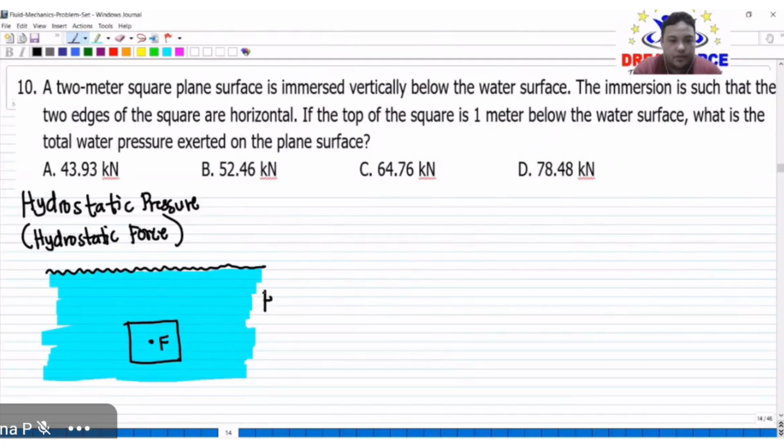So, your pressure or your force is denoted as F na lang. Siguro dito na lang. Ayan. So, ano po yung F na yan? So, your F here now is equal to what? That is equal to your pressure times yung ating area. Area na nakasubmerge. So, take note po, ano po ba ang pressure in terms of fluid? So, F now is equal to, so yung pressure natin may be a gauge pressure. So, this is equal to yung ating specific weight ng ating fluid multiplied by the height.

Pero take note po, since dalawang body to, hindi basta-basta height to. Kasi hindi naman po fluid itself yung tinutukoy natin dito, kundi yung plate na nilubog natin. So, may asterisk yan. So, multiplied by your submerged area. Okay, so ano lang natin yung parameters natin. So your F is your hydrostatic pressure or force. We have also your gamma. So yung gamma natin, this is your specific weight ng fluid.

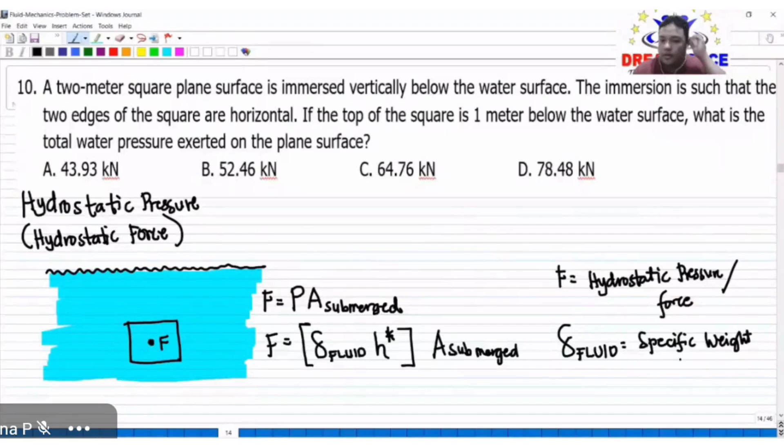We have also yung ating A. So, this is your area submerged. So, yan po yung area na sinubmerge natin. For example, square plate yung sinubmerge natin, so yung square yung ating lalagay dito. Area ng square. So, area of the submerged plate. And lastly, yung ating H asterisk. So, take note po, yung H asterisk natin, since nakafocus tayo sa plate and not the water molecule, so ano po yung H natin dito? So, this is your distance from the surface of the fluid to the centroid.

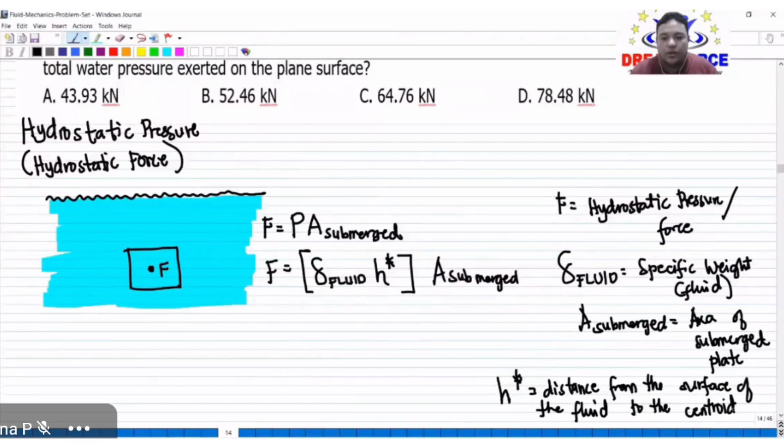So, take note po, centroid ng area submerged. Centroid ng area na nakasubmerge. So, kung square yan, syempre, sa gitna lang yung centroid niyan. Pero kung triangle yan, balik lang kayo sa mga formulas niyo for centroids. Take note po from the surface. From the surface, papunta sa centroid ng ating body.

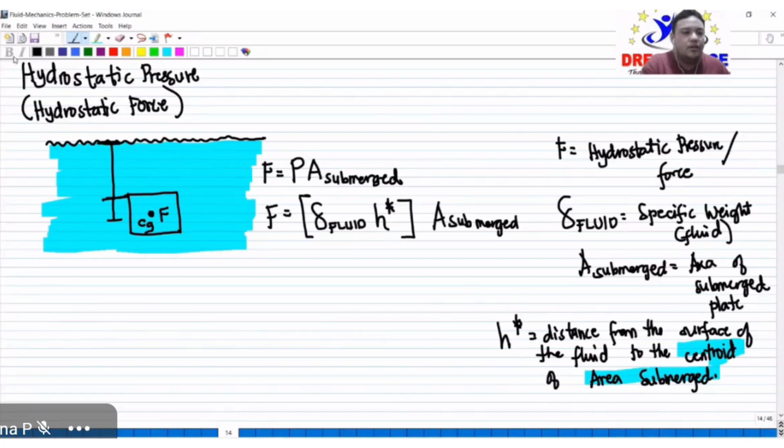Then, take note po, meron pa pong additional na CG. So, yan po yung ating H sana, pero since ang tinitake into account natin is yung plate mismo, ito yung kakailanganin natin. H asterisk. Ayan siya.

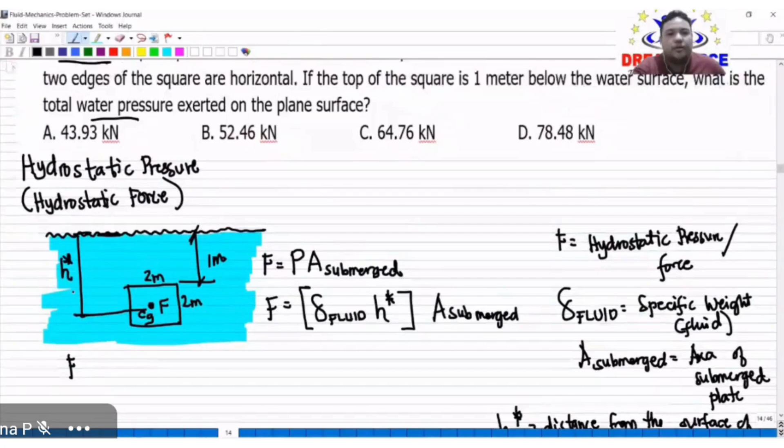Sige. Let's try to solve this one. So, a 2 meters square plane surface is immersed vertically below the water surface. The immersion is such that the two edges of the square are horizontal. So, take note po, 2 meters square. Yung sides niya is 2 meters, and yung centroid niya is mismo nasa gitna. So, if the top of the square is 1 meter below the water surface, from the surface of the water to the top of the plate is 1 meter, what is the total pressure or water pressure exerted on the plane surface? So, take note po, yung ating hydrostatic pressure yan, total water pressure. So, this is referring to your hydrostatic pressure.

So, F now is equal to yung ating specific weight ng fluid times yung ating H asterisk times yung ating area submerged. So, ano po yung ating fluid? Water po. So, therefore, specific weight ng ating fluid, 9.81 kilonewton per cubic meter. Multiplied by yung ating area submerged muna. So, area submerged is a square. So, this is 2 times 2 or 2 squared meters squared. Multiplied by yung ating H asterisk. So, take note po, distance from the surface to the centroid. Ang binigay pa lang dito is from the top of your vertical gate.

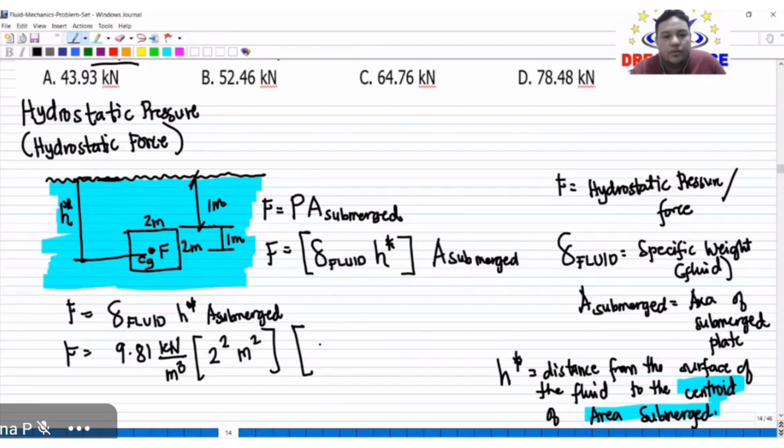Okay? So, bababa pa tayo papunta sa centroid. So, ano yung centroid ng ating square gate? That is 1 meter below the top. Okay? So, this is 1 meter pa rin. So, yung total niyan ay 1 plus 1, which is 2 meters. So, ano magka-cancel? Yung meter at saka yung meter squared at saka yung cubic meter.

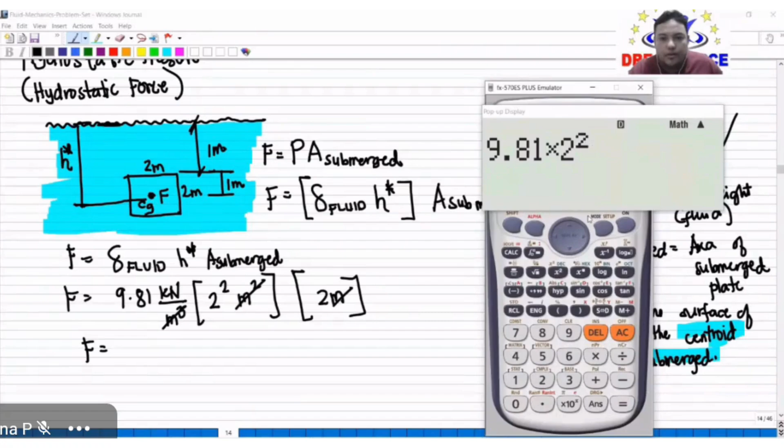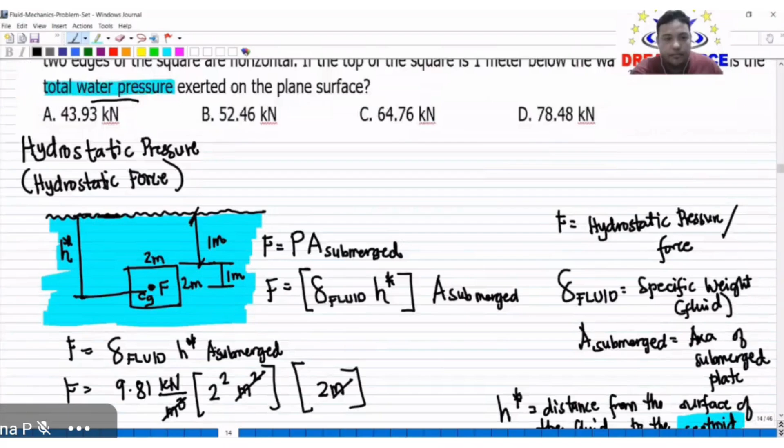So, ano na po yung ating F in terms of kilonewton? So, this is 9.81 times 2 squared multiplied by 2. So, this is 78.48 kilonewton. And that's letter D. Okay.

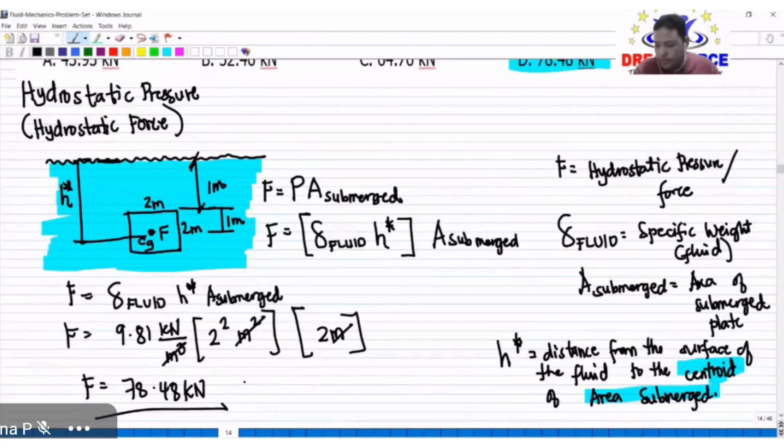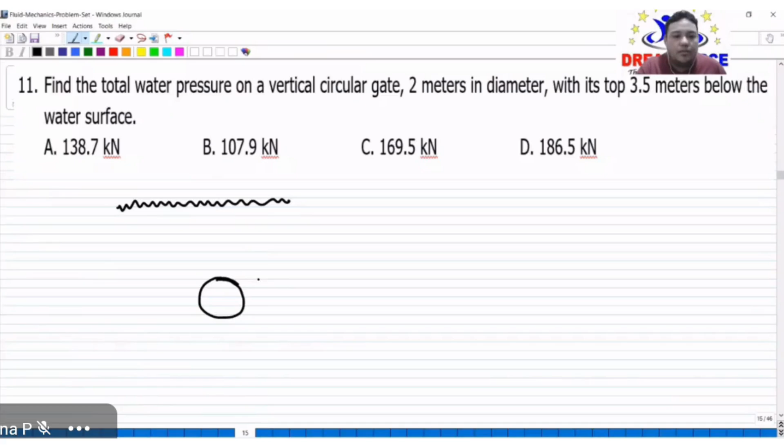So, next na tayo. Number 11. So, more on hydrostatic pressure. So, find the total water pressure on a vertical circular gate. May nilagay tayong circular gate daw dito. So, 2 meters in diameter. With its top, okay, yung top natin daw dito is 3.5 meters below the water surface. So, this is 3.5 meters.

So, hanapin daw natin yung total water pressure. So, saan po yung exertion ng ating water pressure? Sa centroid mismo ng plate. Okay, since this is circular, nasa center ng circle. Okay? So, take note po, total water pressure. So, F is equal to specific weight ng fluid multiplied by yung ating area submerged multiplied by yung ating H asterisk.

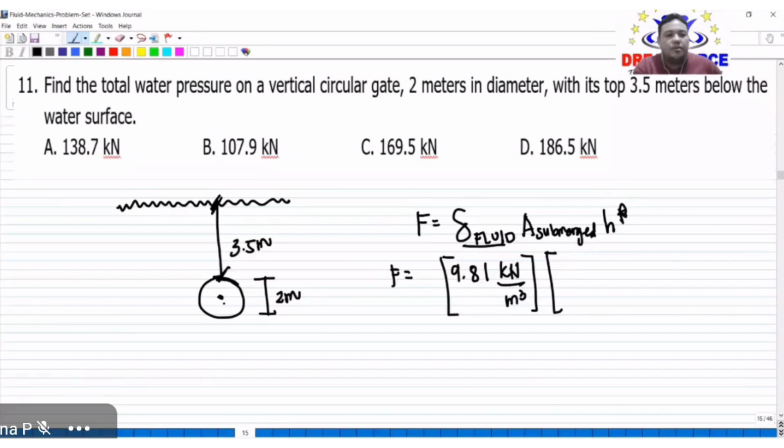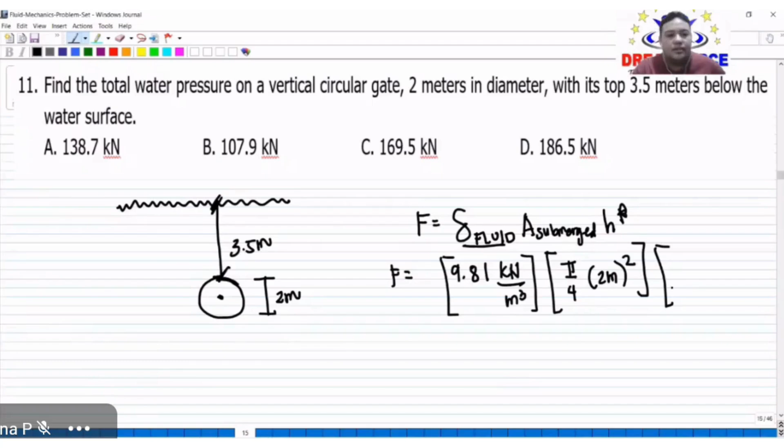So, therefore, F, take note, fluid natin, water, 9.81 kilonewton per cubic meter. Specific weight. Times yung ating area submerged, circle. So, this is pi over 4 d squared, okay? So, given yung diameter, so this is times 2 meters, the quantity squared. Multiplied by your H asterisk. Take note po, from the surface papunta sa centroid. Okay? So, ano po ba? Ito.

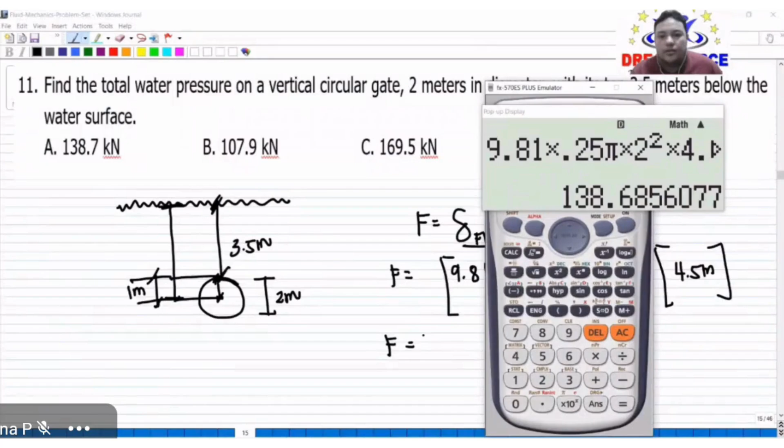Okay, so meron pa tayong natitirang hindi alam. So from the top going to the center, this is equal to the radius, which is 1 meter. So which is equal to 3.5 plus 1, so this is 4.5 meters. So therefore, F is equal to 9.81 times 0.25 pi times 2 squared times 4.5. So this is now equal to 138.686 kilonewton. And this is letter A.

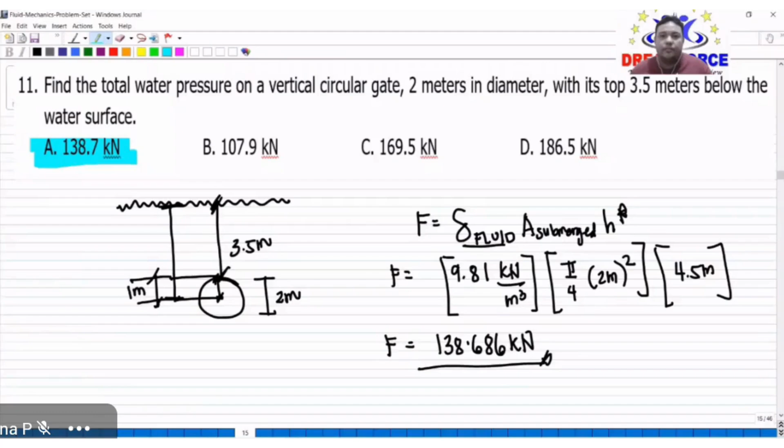Okay, punta tayo sa next. Okay, buoyancy naman po. So take note po, kapag may pinalubog tayong body, eventually lulutang yan. So bakit yan lumutang? Because of your buoyancy. So ano po ba ang principle ng buoyancy natin? For example, may pinalubog tayong body, then eventually lulutang. So ano po ba ang cause niyan? If we will analyze this one, eventually lulutang.

So first, syempre meron itong weight. Hindi naman nawawala yung weight sa ating body. That is due to the gravitational pull. Pero bakit nga ba lumulutang yung ating mga body? Because of your BF or yung ating buoyant force. So merong tumutulak sa kanya pataas. So this is BF, known to be your buoyant force.

And from the principle of Archimedes, Archimedes' principle, or yung ating tinatawag na buoyancy, your buoyant force BF is equal to yung ating specific weight ng fluid multiplied by yung ating volume submerged. So yan po yung ating buoyant force. Yan po yung tumutulak sa ating body pataas, kaya may mga lumulutang.

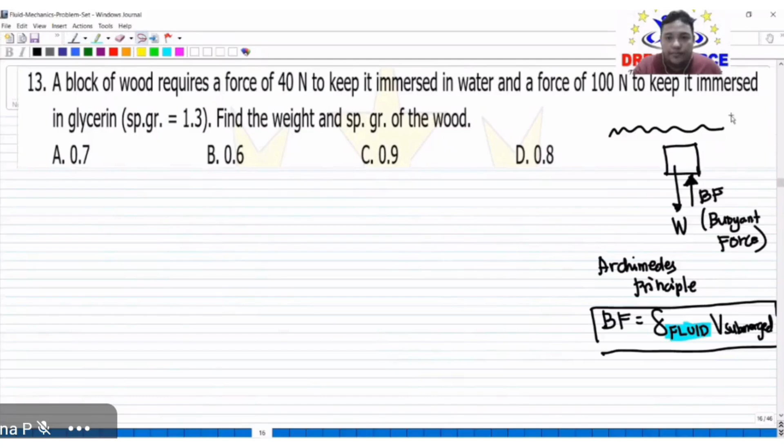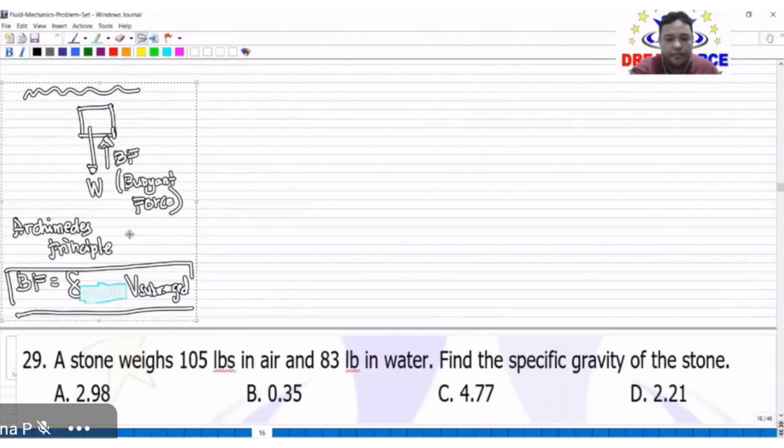And yung buoyant force natin ay nakadepende sa klase ng fluid natin. Kung siya ba ay tubig, glycerin, o oil. So, depende yan sa fluid natin. Okay, so let's move on to number 13. Ibaba ko lang po ito. Siguro ito na lang, sa pinakababa. Okay.

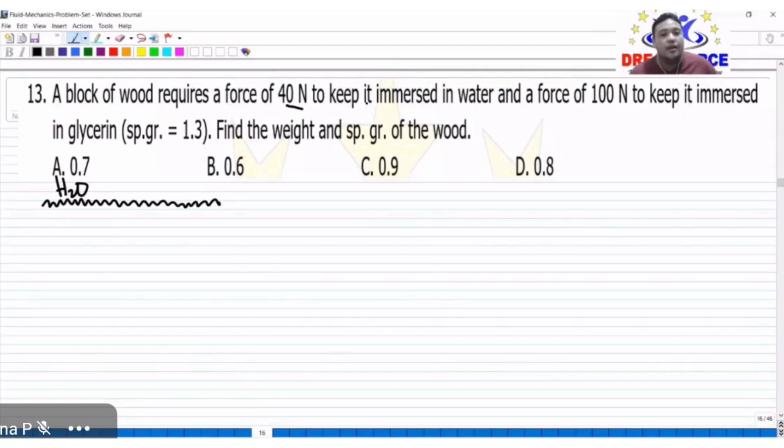A block of wood requires a force of 40 newtons to keep it immersed in water. Take note po, kapag nasa water po siya, mag-exert pa tayo ng 40 newtons para tuluyan pa siyang lumubog sa tubig. Otherwise, kapag tinanggal natin yung 40 newtons na yan, lulutang talaga siya. So block of wood, siguro cubical ito. Drawing na lang natin.

For example, ayan siya. So a block of wood requires a force of 40 newtons to keep it immersed in water. So, kapag i-immerse pa natin, meaning pababa yung ating external force dito. So, take note, this is in H2O or water.

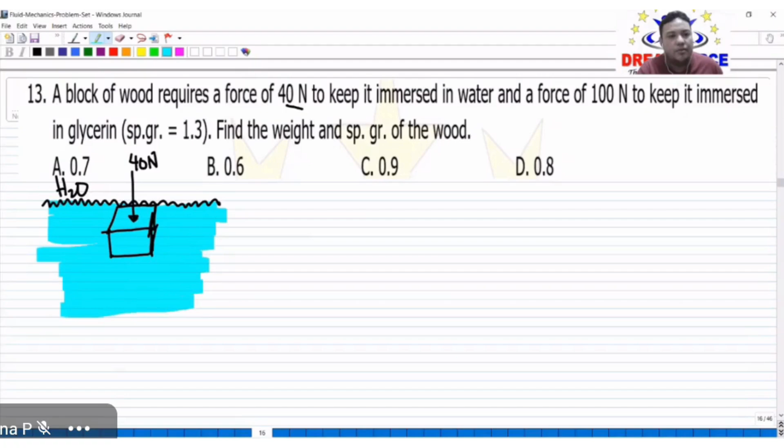So, syempre, bukod sa 40 newton na yan, ano pa yung mga naturally occurring forces dito? So, first is yung ating weight ng block. Okay, block ng wood. And syempre, since nakalubog siya sa fluid, meron siyang buoyant force. Okay? Buoyant force due to your water.

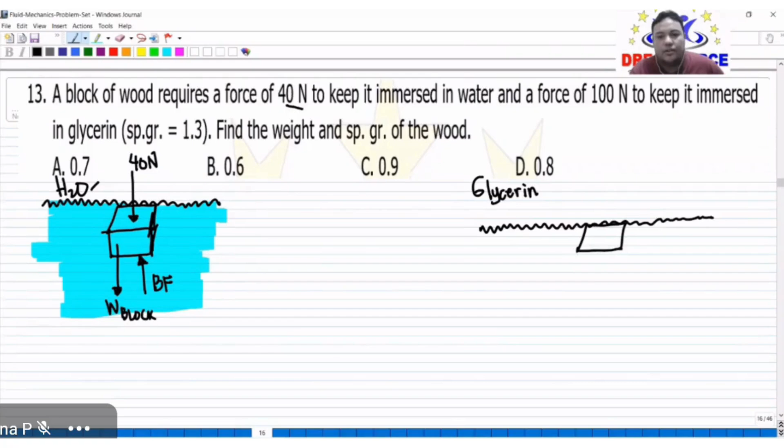So, yung SG ng glycerin is equal to 1.3. Take note po kapag SG ng water, 1.0 lang yan. Density ng water over density ng water, 1 lang rin yan. Okay? So, mag-drawing lang tayo ng ano dito. Kulayan lang natin ng yellow para alam natin ibang fluid ito.

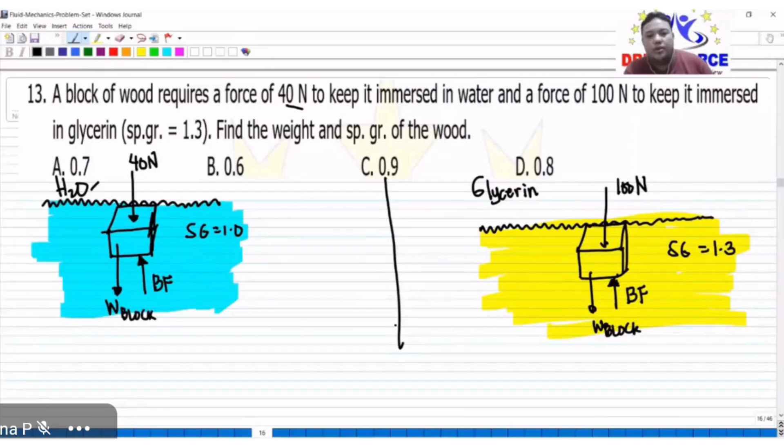Okay? Ngayon, ano naman po yung mga ano natin dito? Kinakailangan ko, syempre, yung mga hindi nawawala sa kanya. So, specifically, yung weight natin. Weight ng block. Tapos, yung ating buoyant force. Buoyant force na dahil dun sa ating glycerin. So, dalawang kondisyon kapag nasa H2O or nasa water or kapag nasa glycerin. So, i-analyze na lang natin to.

Take note po, hindi naman sinabing natapyasan yung block of wood. So, therefore, we can say that the block of wood here in your H2O or dun sa water natin is equal to the block of wood dun sa ating glycerin. Kumbaga yan yung mass ng nakalubog na bloke ng wood. So, equal pa rin sila. So, ang nag-iba lang po is yung buoyant force at yung in-exert lang natin na force.

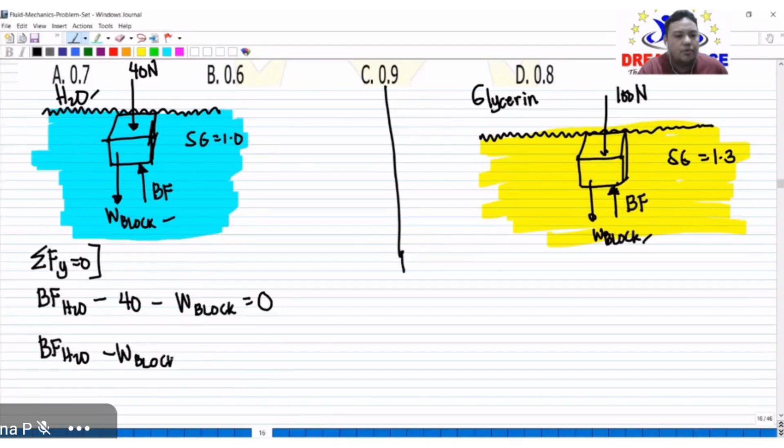So, therefore, summation of forces along y is equal to 0. So, equilibrium pa rin naman ito. So this is equal to yung buoyant force natin due to water minus lahat ng mga pababa. So this is minus 40 minus yung weight ng block ng wood, and this is now equal to 0. So therefore, buoyant force due to water minus weight ng bloke ng wood is equal to 40 Newton.

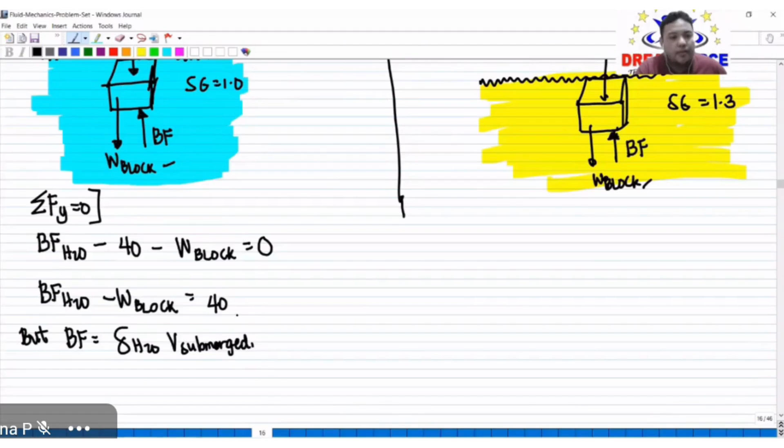So, take note po, yung ating 40 dito, ang unit niya, Newton. So, therefore, yung bloke ng wood, that is also Newton. Pero take note po, ano po ba ang ating BF? BF is equal to specific weight ng water times yung ating volume submerged. Alam ba natin yung volume ng bloke ng wood? Hindi naman. Pero alam natin yung specific weight ng tubig. So gawin na lang natin Newton rin ito, hindi kilonewton.

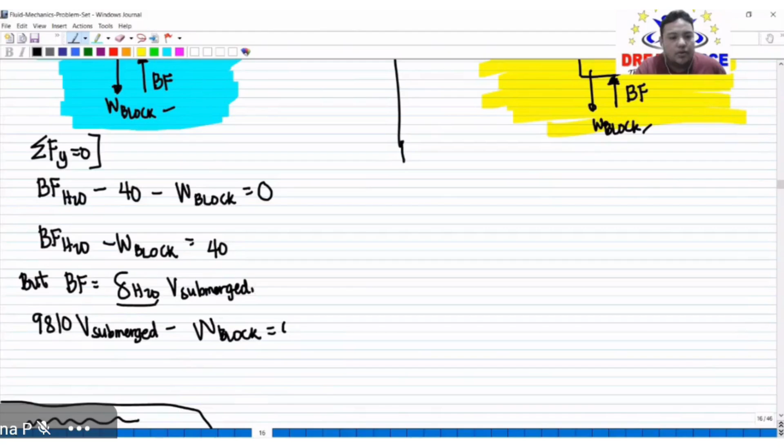So 9,810 Newton per cubic meter multiplied by yung ating volume submerged minus yung weight ng ating bloke ng wood, and this is equal to 40. And this is equation number 1. So, saan natin kukunin yung second equation natin?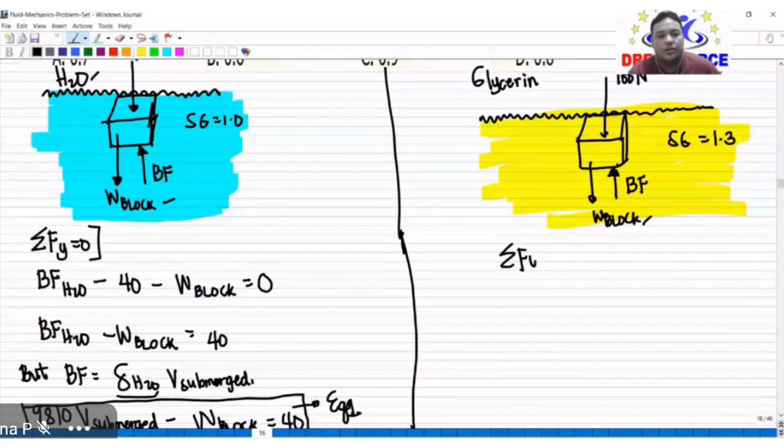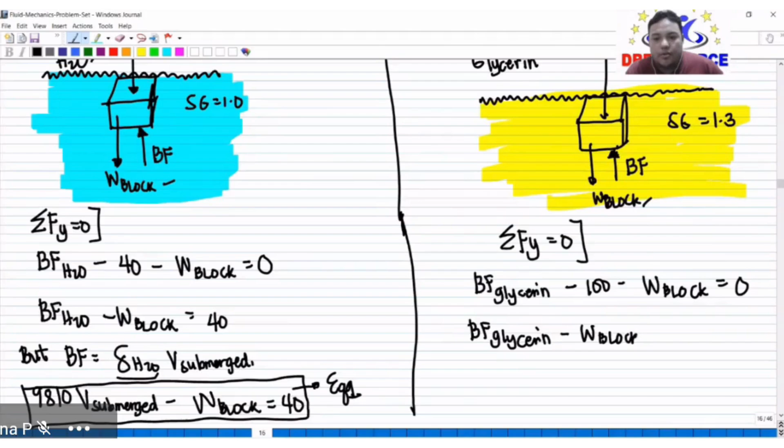Siyempre, dito sa ating second condition. So, kapag magte-take tayo ng summation of forces along vertical equal to 0, parehas pa rin. So, BF due to your glycerin minus 100 minus weight ng bloke ng wood, which is equal to 0. So, therefore, BF due to glycerin minus weight ng bloke ng wood is equal to 100, and yung unit ay Newton. So, compatible naman sa equation number 1.

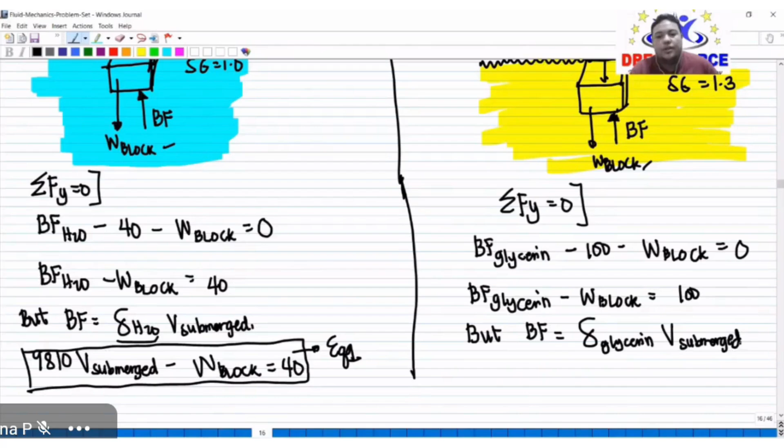Pero take note po, yung ating BF due to glycerin is equal to specific weight ng fluid natin, particularly glycerin, multiplied by your volume submerged. Pero yung volume submerged natin, hindi natin alam. And take note, total submersion, so lahat po ng body natin nakasubmerge. And since hindi natin tinapyasan yung bloke ng wood, we can say that your volume submerged dun sa H2O will be equal to the volume submerged dun sa glycerin.

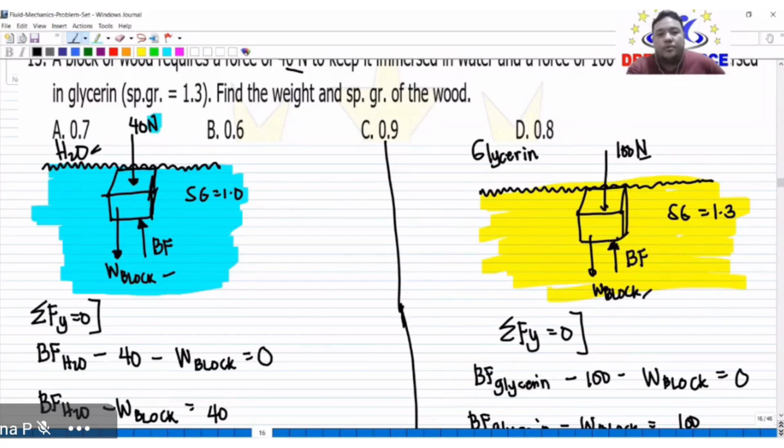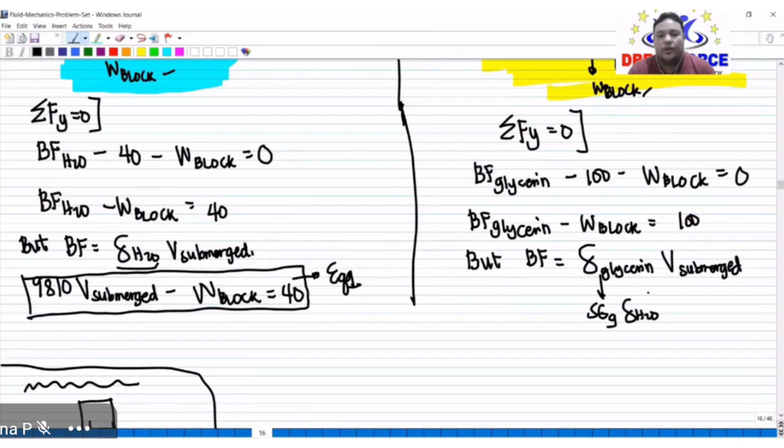Okay, kasi yung volume naman referring to the amount of space na na-obtain ng material mo. Okay, so therefore this is equal to what? So ano po ba yung specific weight ng glycerin? This is Sg ng glycerin times yung ating specific weight ng tubig. Okay, so lagay natin dito sa working equation natin.

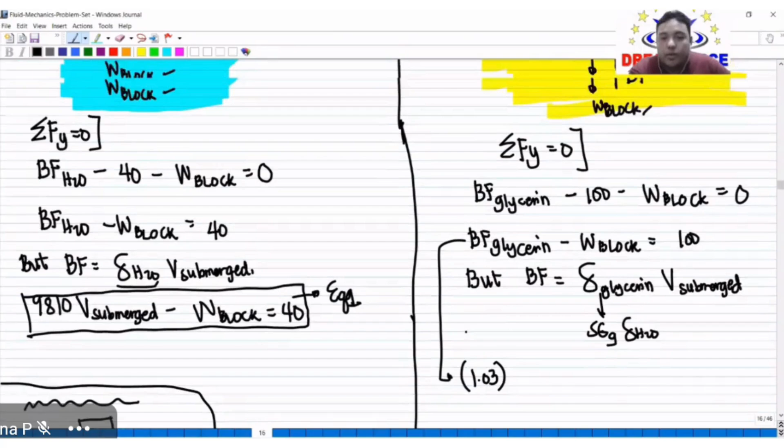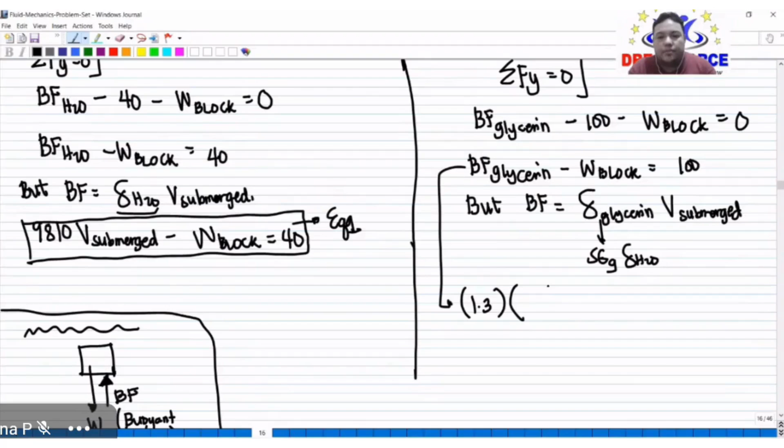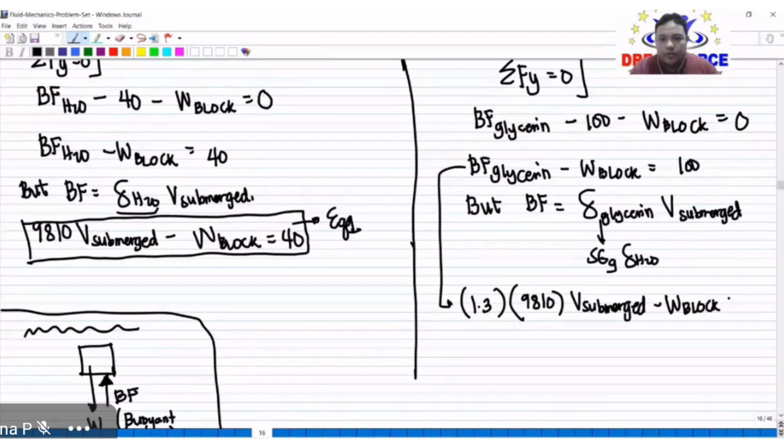Okay, so this is now Sg ng glycerin 1.3. Sorry, 1.3 pala. Okay, 1.3 multiplied by yung ating specific weight ng tubig, so 9810 multiplied by volume submerged minus yung weight ng block is equal to 100. And this is equation number 2.

So two equations, two unknowns, dalawa yung ating unknown. Okay, so this is mode 5.1. Okay, so unahin na natin yung volume submerged. So this is equation number 1. So 9810, minus 1, then yung constant natin 40. Then sa second equation natin 1.3 multiplied by 9810. So yung ating W block is negative 1, equal natin sa 100.

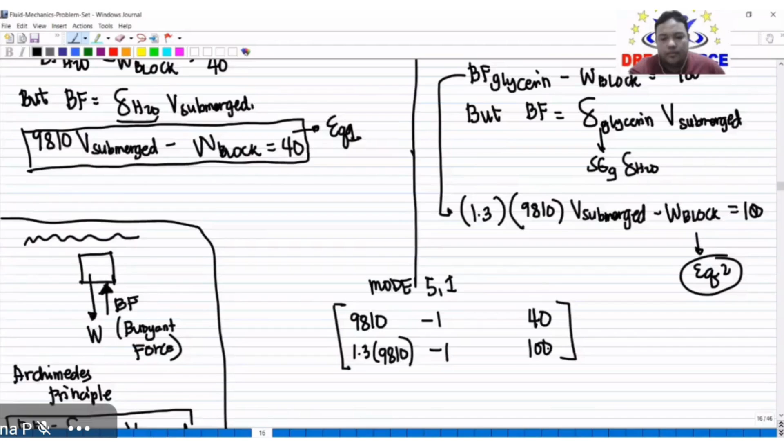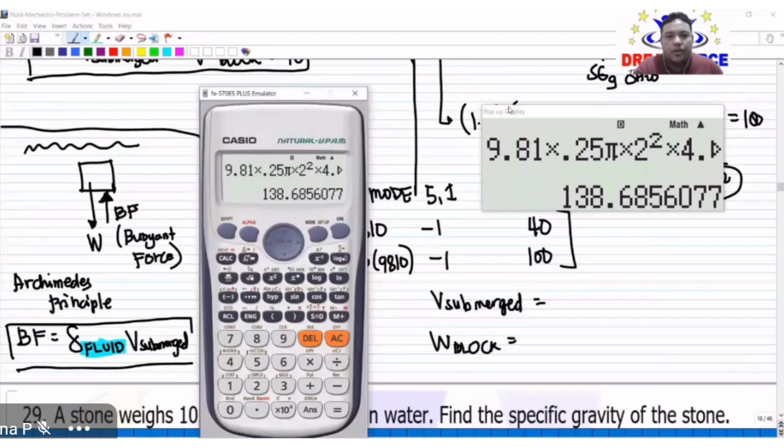So, dalawa yung makukuha natin: volume submerged and yung ating weight ng block. Okay. Paki-compute po. Compute natin. So, this is mode 5.1. So, 9810, negative 1, 40. Then dito, 1.3 times 9810. Then negative 1, 100.

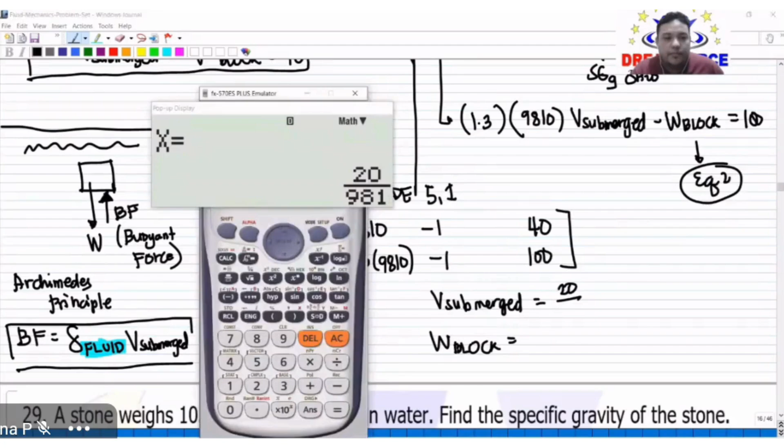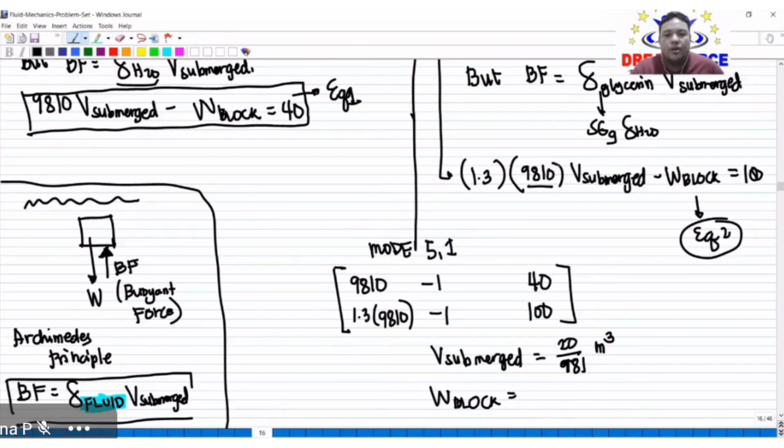So, ano po ang ating volume submerged? This is equal to, okay, gawin na lang nating fraction. So, 20 over 981. So, ang unit nito ay cubic meter. Okay, bakit cubic meter? Kasi yung ating density or yung specific weight ng ating tubig is naka-Newton per cubic meter. Kaya dun siya kukuha ng volume na unit. Then yung ating Y, or that's your weight ng block, 160. So this is now in Newton.

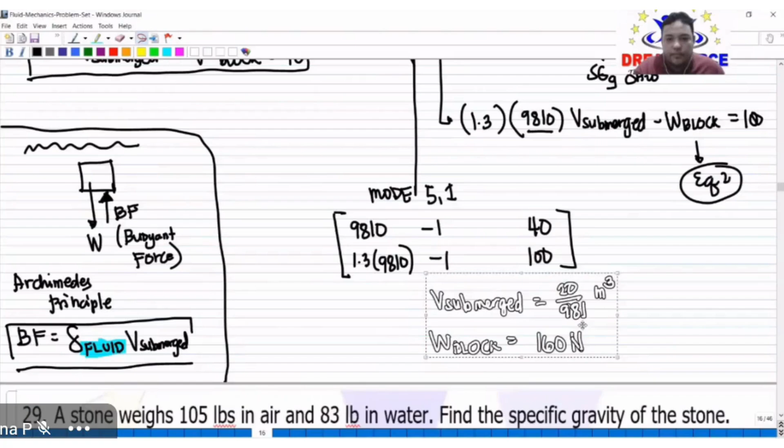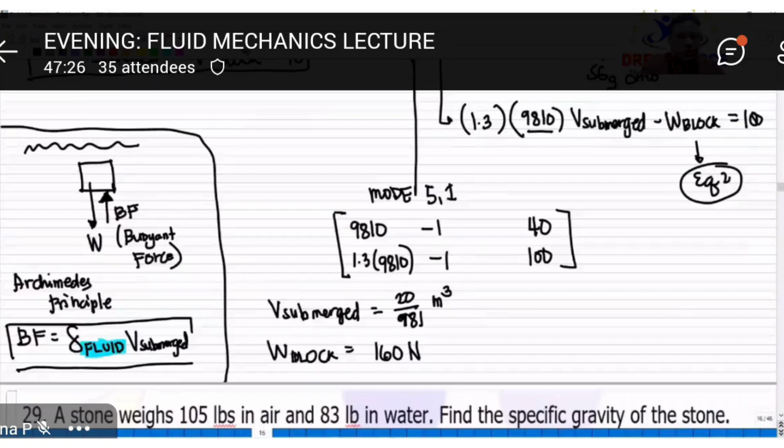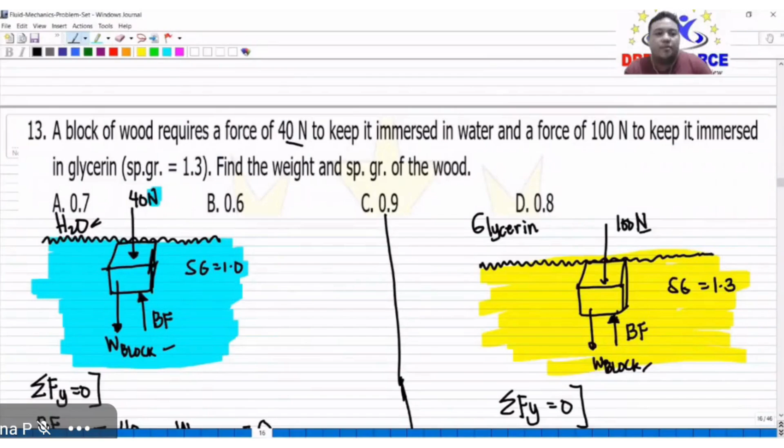Okay? Pero ano ba ang tinatanong? So, ang tinatanong po is yung weight at saka specific gravity ng wood. So, nakuha na natin yung weight ng wood, which is 160. But the problem is, wala sa choices natin. So, ano ba ang napapansin natin sa choices? Puro point lang. Point something. So, siguro, specific gravity yung hinahanap dito. Okay? So, specific gravity ng wood.

Take note po, specific gravity ng wood in terms of weight, specific weight. So, therefore, this is what? Specific weight ng wood over specific weight ng water. Take note po, kung hindi natin alam yung gagawin natin, tingnan natin sa unit. So, yung unit ng ating H2O, this is Newton per cubic meter, meaning force over volume. So, why not weight na lang over volume. Okay? So, isunod natin yung units.

So, therefore, this is 160 Newton over yung ating volume, which is 20 over 981, and this is cubic meter. Okay? Newton per cubic meter. All over yung ating H2O, so Newton per cubic meter rin to. So 9810 Newton per cubic meter. So ano mangyayari? Cancel, cancel, cancel. So SG ng wood must be unitless.

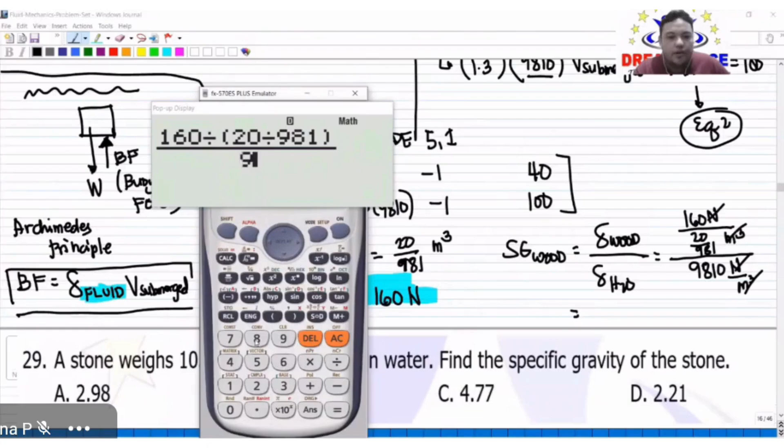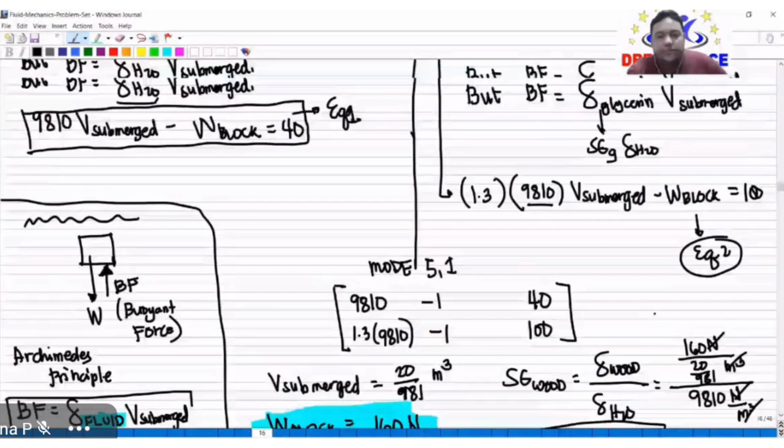So ano po ang ating SG ng wood? So this is 160 divided by the quantity 20 divided by 981, over 9810. And this is equal to 0.8. So this is your SG ng wood. And this is letter D. Okay.

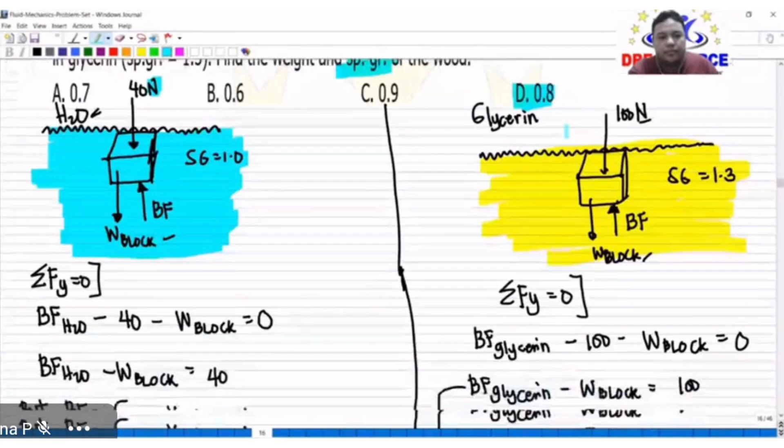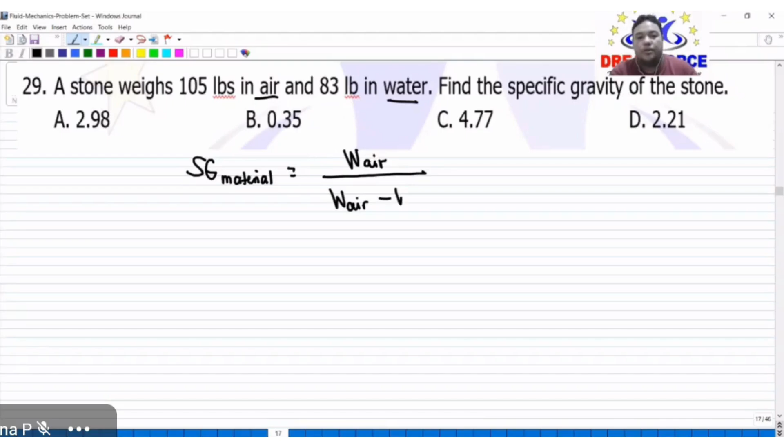Part 1, then part 2. Ang mga material natin, given yung ating weight in air at saka weight in water, this is equal to yung weight niya sa air, all over yung weight niya sa air pa rin, minus yung weight niya kapag nasa tubig siya. Okay? So therefore, ito po yung ating formula. Take note, pwede niyo magamit sa ibang material, hindi lang stone.

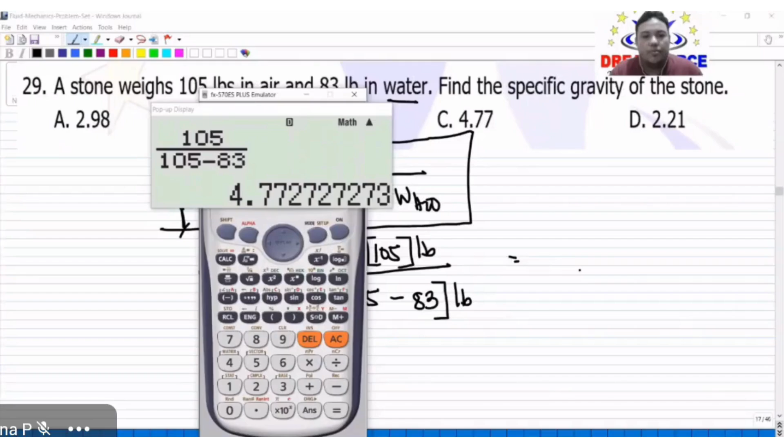So therefore, SG ng ating stone is equal to weight niya sa air, so that is 105, over yung kanyang weight ulit sa air, so that is 105, minus yung ating weight kapag nasa tubig siya. Take note, pound ito, this is also pound. So unitless pa rin tayo dito. So 105 over 105 minus 83. And this is equal to 4.77. Unitless. So ibig sabihin, lulubog siya sa tubig mo.

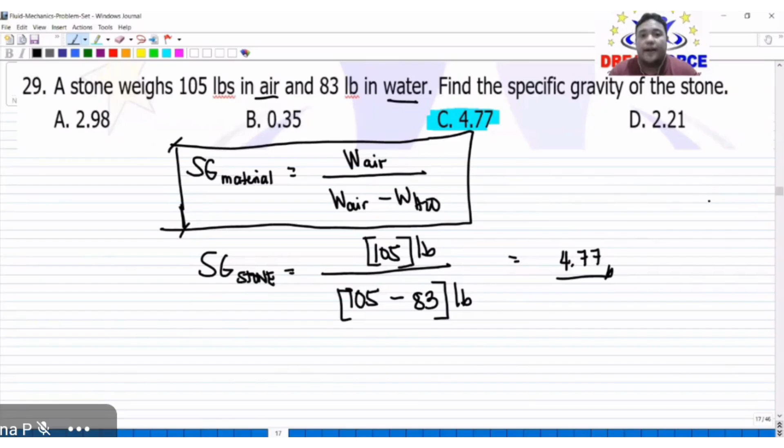Okay? Kasi mas mataas yung kanyang specific gravity. So ganyan po yung nangyayari. So kapag mas mababa yung specific gravity mo, chances are lulutang ka. Pero kapag mas mataas yung specific gravity ng material kaysa dun sa fluid, lulubog ka. Okay? Yan.